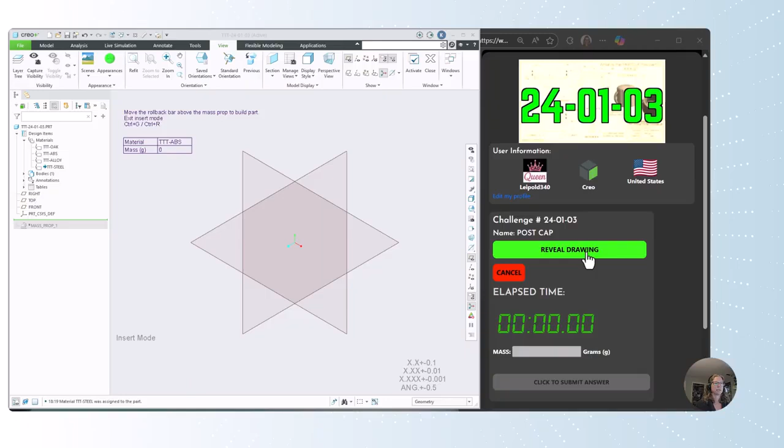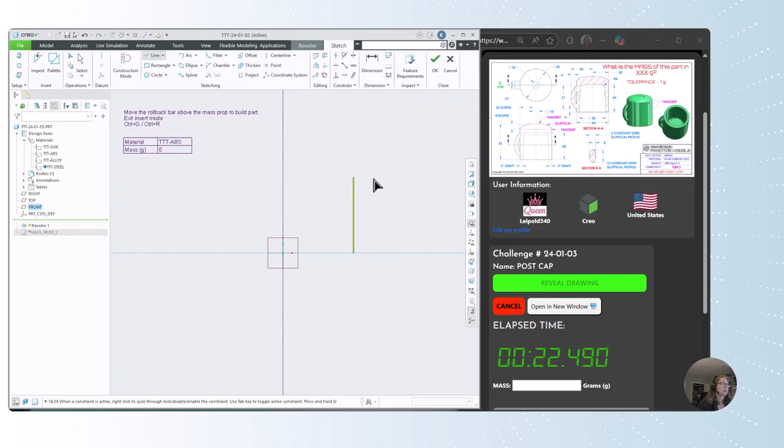In revolves in Creo, we really want to make sure that we're getting the sketch done inside the revolve and really make sure you're focusing on getting that axis of revolution included. Okay. The other thing you want to make sure that you do is close the loop. But when you have that axis of revolution, it'll automatically give you your diameter that you're going to end up needing.

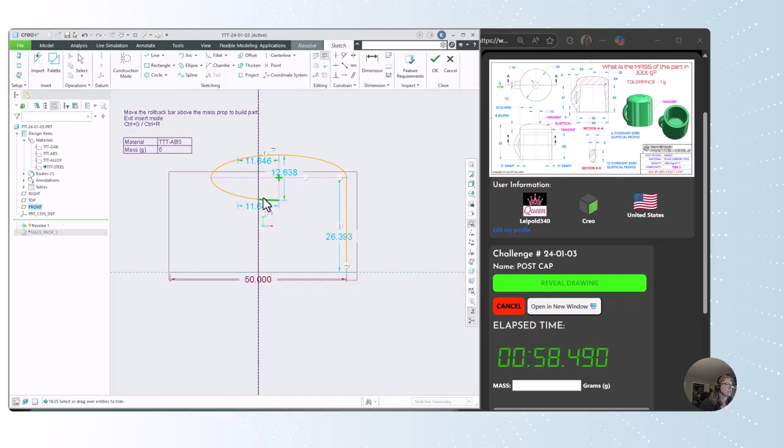And let's see here. We have a line up here. And then we have an ellipse. Sorry, I want to switch that to center ellipse. So this center ellipse starts here. And we got a lot of trimming to do on this one. So we're going to get rid of this piece and zoom in up at the top.

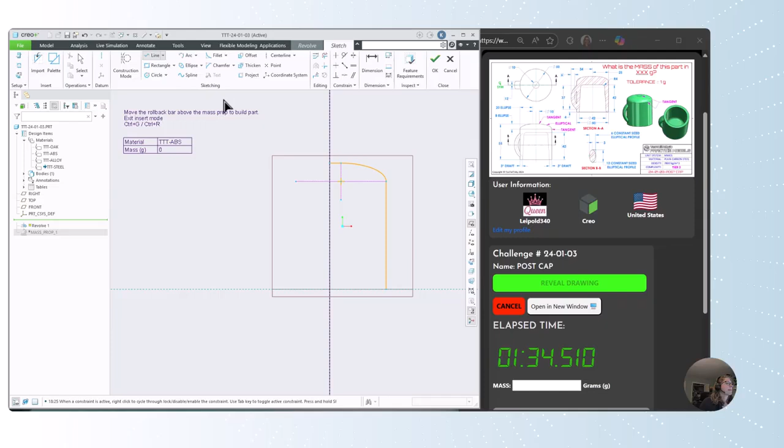All right, get some more dimensions. This is 8. And our overall height is 55. Okay. 50 for the diameter. Yep. Overall height is 55. All right. Oh, this is going to be 10. We're going to keep going. We're going to add some inside. Add a round in there in just a second.

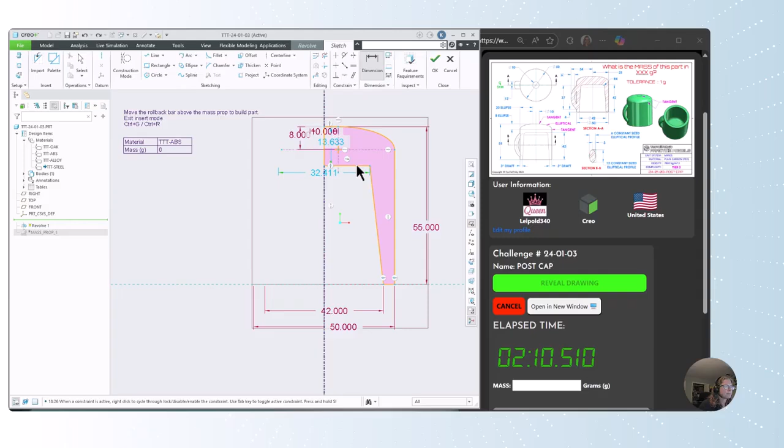And let's see here. Let's get this dimension. And what else do we need? We need a dimension for the depth of the inside. Middle click to place that. Control Z. Sometimes I have found in Creo, it does. There we go. It's pretty angry at me about what I pick. And then we're going to pick this corner here and get a dimension on that.

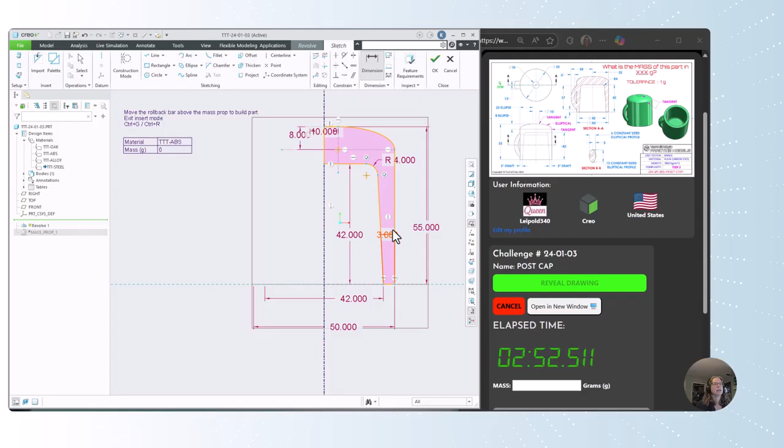And it dropped my outer diameter, so I have to force that. So outside, center line, outside, middle click to get the full diameter. I think of that as measuring the radius and then doubling it. Okay, make sure it's a closed loop, make sure it's filled in pink, and then you can get that revolve. Okay.

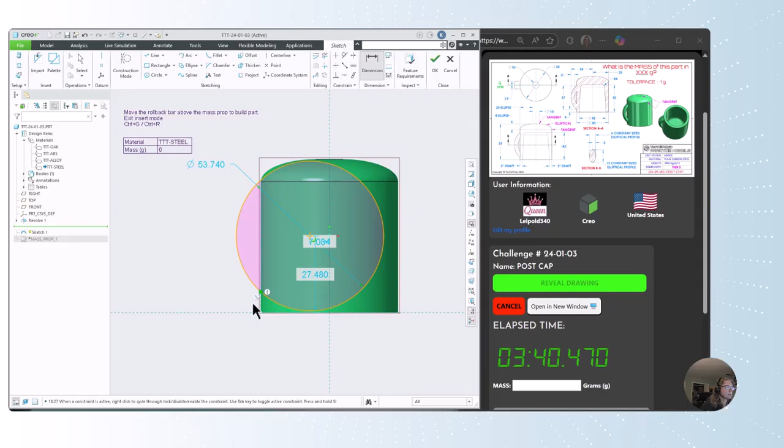All right, now for this handle, there's a couple ways to do it, but we'll do it as a sweep. So we'll make the sketch on the front plane. And we're going to make a circle. And the circle is going to be way lower than that. Let's see here. So what we need from our arc is we need a point at the intersection of the edge and the arc. And that is going to be dimensioned as 4. There we go. Yep. And then from there to the top, we'll get there.

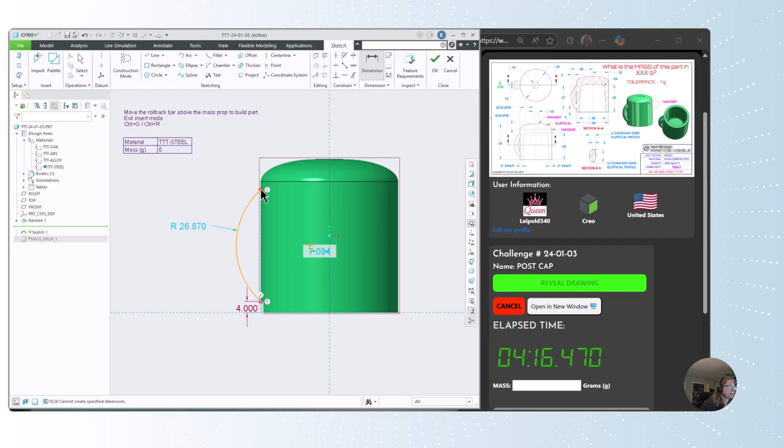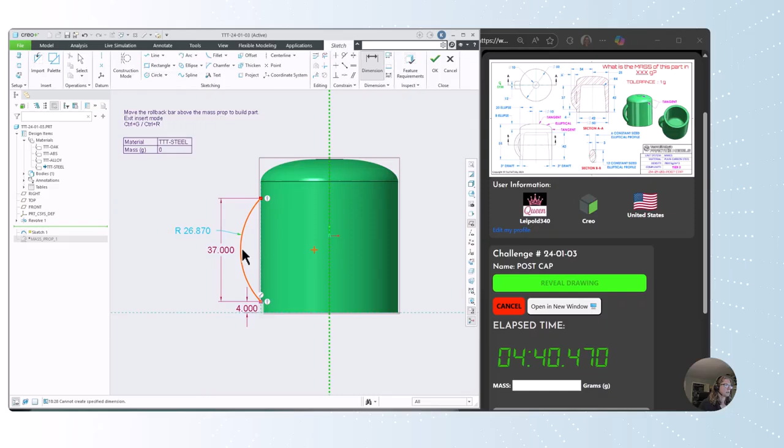Actually, let's trim. We know we're only going to need the outside stuff, so let's get rid of the inside, and then we can dimension here to here. Man, I think it must be my mouse. It is angry with me today. Point. Go. And this dimension. Nope. This dimension from here to here. Have to be very intentional today.

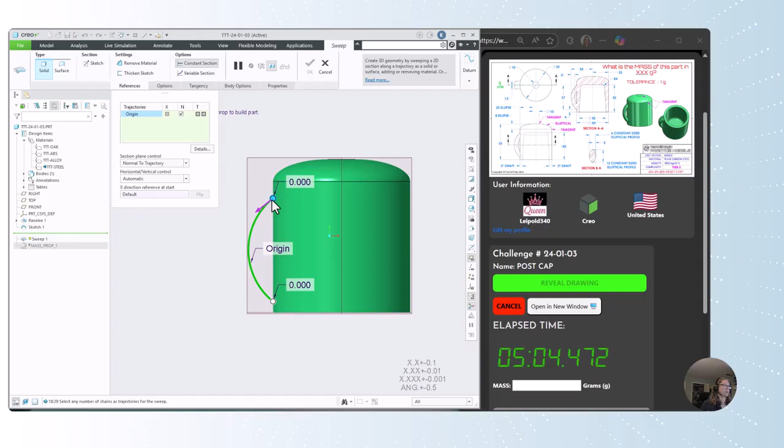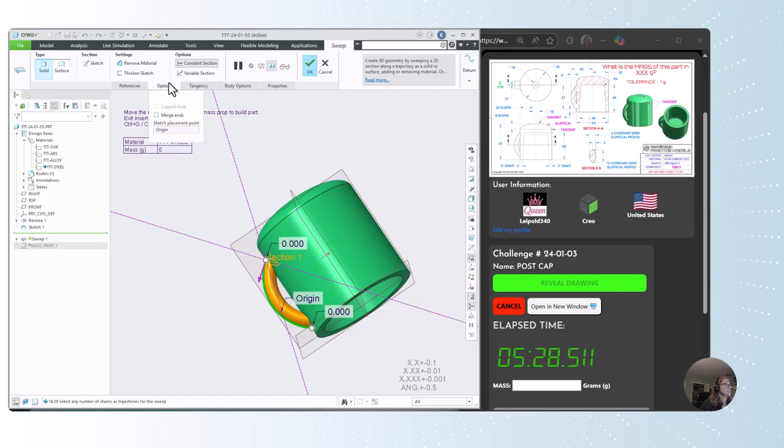All right. So, important thing to keep in mind with this one is this sketch is the outside. So, when we go into our sweep and we have to make our sketch down here, the ellipse that's going to follow that is going to be height of 12 and a width of 6. But it's going to be the outside that's following it. So that's our sketch. There is an option to merge ends if that was necessary. I'm not sure. I think everything looks okay, but there's our handle.

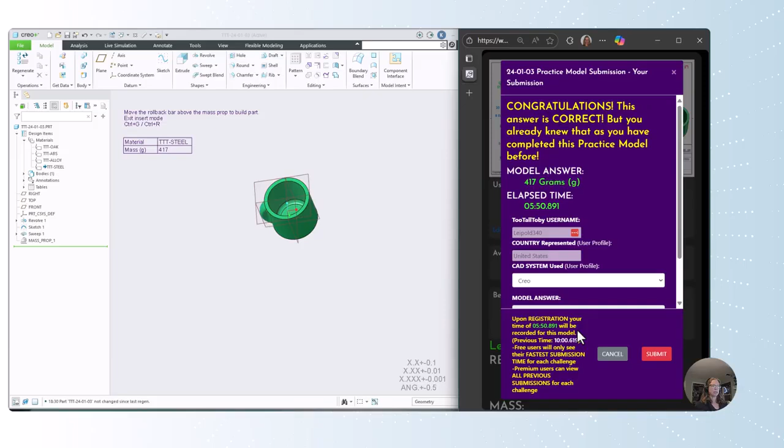All right. I don't see any rounds. That looks great. Let's check our mass. So Control G, Control R, and we will put in 417. Ta-da! All right, so a revolve and a sweep, a couple of ellipses in that one, a little bit different, and just taking that extra time to make sure that dimensioning is correct.